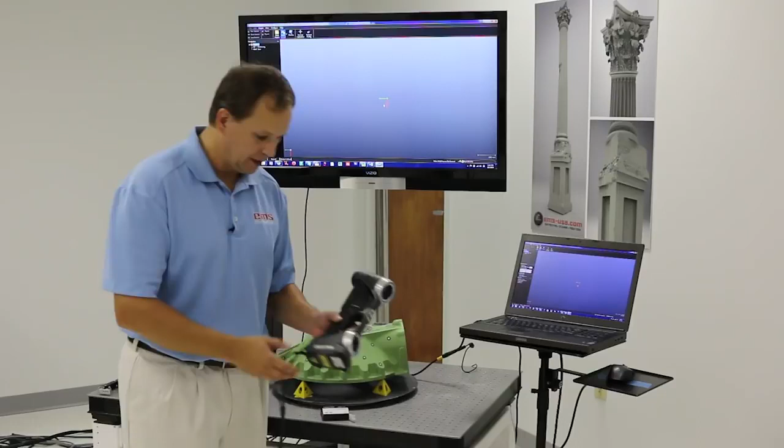In this video we're going to demonstrate the new Creaform HandySCAN. It comes in a 700 and a 300 model. Now Creaform's been around for a long time and known for its handheld scanners. This new scanner is really a big advancement in their handheld scanning technology.

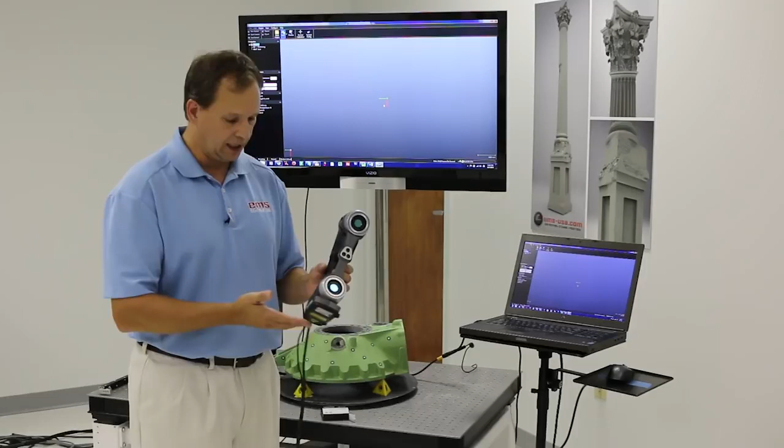The first thing you'll notice right away is just how small it is. You can see it's very narrow, it's very compact, lightweight, weighs just over a pound, very easy to handle and scan. So like most of their scanners, the way this one works is you've got two sensors here in the front, basically cameras, okay? And then here is where the lasers project out.

Now this is one of the new and unique things about this new model, which we'll talk about here in the demo today. And then around the sensor you have some LED lights that light up the targets, which we'll show and talk about here shortly.

This scanner, this is the whole unit here with a USB 3 cable, plugs into a compatible laptop or desktop computer with the Creaform VXelements software, which is basically the capture software. So again, very lightweight, very portable. This is great when you have to get out in the field and get into tight areas, such as a vehicle or inside a big industrial pump or big housing or anything like that.

It's laser based, so it works very well on shiny and dark things. It also works in outdoor light, direct sunlight. So that's very handy, or where you have parts that have varying color. Okay, and we've got some new buttons here on the back I'll talk about for handling situations like that. And again, very small and portable.

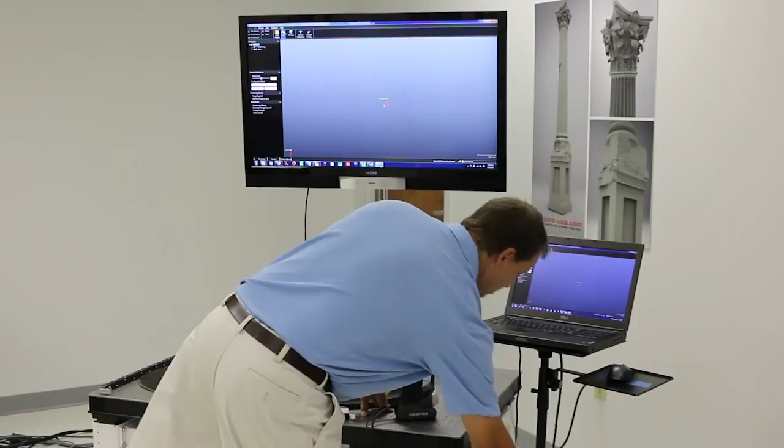Here's the case that it comes with. So you can see here it's very small. We can ship this overnight to all our different offices for a reasonable price. I can get it shipped overnight, and they can have it at the other office and get out in the field and start scanning. Or if we're going to go fly somewhere, I can put this into the overhead compartment on an aircraft versus having to check it as luggage. So again, very portable, very easy to use, as you're going to see here in the demo.

Now with the HandySCAN scanner, it requires targets on the part in order to scan, okay? And a lot of times people think, oh, targets, I'm going to have to target the part, that's a lot of work. It's actually really easy on most things, and then there's some other tricks I'll show you. The advantage of targeting the part is it allows many things to happen. One, I can move the part around because the targets are on the part. It's going to be looking at the targets and allow the part to move around.

The other thing is targets improve accuracy. Even scanners that don't require targets, most people end up using targets with them anyways because they'll improve accuracy. If you're just doing geometry-based alignment, which is basically take a scan, take another scan, line them up, there's more room for error in those alignment processes, and the more you scan, the more error you can get. Okay, so targets are really a good thing, and they come in different formats.

This is an aluminum part, so I'm using sticky targets. Basically, they come in a box like this. They self-dispense. I just pull this down, grab a target out, and place it somewhere here on the part. Okay, and you need the targets on a small part like this about every 3 or 4 inches. On something bigger, flatter, you might get away with larger targets. So we have the sticky targets, we have magnetic targets, and then we have other things we use.

So sometimes we have a small part or maybe a tall, long, skinny part. I might fixture up some target bars, have the part in the middle, and have maybe 2 or 3 of these bars. And as long as the targets are in the line of sight, the scanner will pick up the part shape while it's looking at the targets. So they can be around the part on something like this.

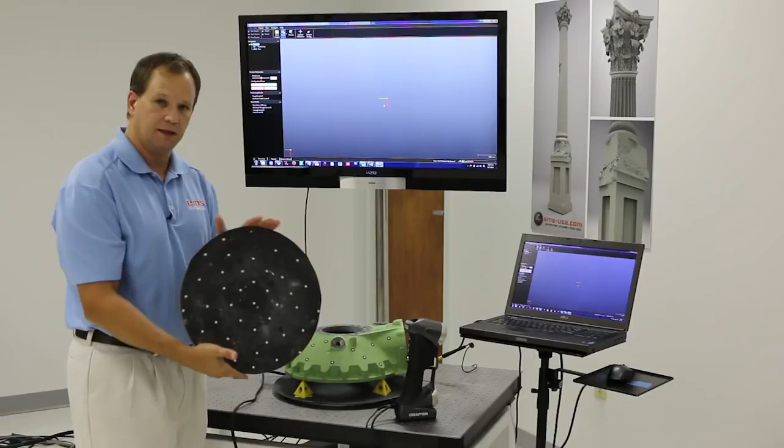Sometimes we'll just have a small part and set it on a table like this that has targets on it. The only disadvantage to this setup is once you set it here, since the targets aren't on the part, you can't move that part around, okay?

So the advantage of targets is, in this case, I've got a part that I have to scan both sides of. You're going to see me be able to do that automatically, whereas if I was using an ARM-based scanner, I'd have to scan the part, save that file, flip it over, and scan it again.

The problem with ARM-based scanners is the part can't move while you're scanning. The base of the arm can't move, and you need a real rigid setup, almost like a CMM, to keep your accuracy, otherwise you'll have multiple setups. You have to calibrate, and if you're doing large parts, you need a process called leapfrogging, and all of that introduces error. With targets, it just makes it easy to scan.

So about a minute to target a part like this, and you're going to see the payoff, which is how quick and easy we can scan.

So how targets work is really a process called triangulation. Just like GPS, where you need to see 3 or 4 satellites in the sky, the scanner does the same thing. It needs to see at least 3 or 4 targets, and most of the time it sees more than that, which lets it track its position as we continuously scan around.

So as we go around, as long as it can see those targets, it'll scan. If it can't, it'll stop scanning and go to a different spot. You can see the targets are actually random here on the part. You want them to be random - if they were all symmetrical, it would actually get lost.

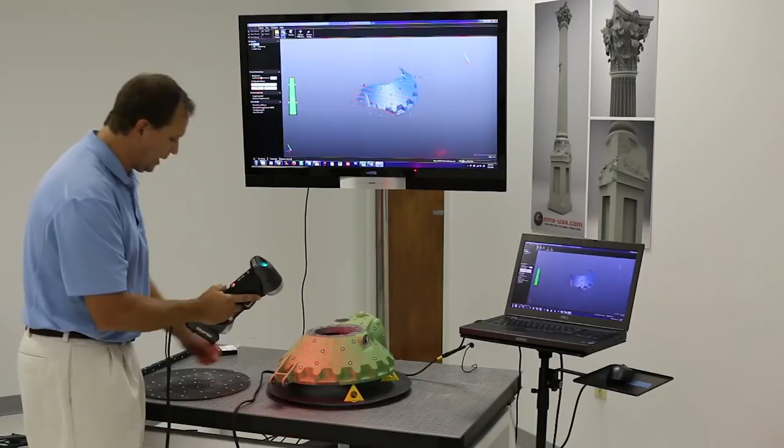Basically the way it works is there's a button on the back, and we literally just click it once and start scanning. You can see all the laser lines, and as I move around the part, you'll see the targets will either be white or red - as it acquires them, red means it's using it and white means it basically knows about it. You can see how quickly I'm moving around this part, and we'll move up and down.

Now we're going to get to an area here that's bare metal - real shiny - and it's actually doing a pretty good job. But at any time, I've got a couple different things I can control, one being the shutter, which slows down or speeds up. In this case I want to slow down the shutter speed and increase the laser power so when I have dark or shiny surfaces I can do that. The downside is I have to go a little slower because it can't capture the data as fast, but having this mode where I can turn it up and down right as I'm moving along is great.

So now I've already got that area, I'll crank it down a little bit, and you can see me moving along. Like all scanners, it's line of sight, so as I move around we want to aim the scanner perpendicular to the surface - that always gives us the best data.

Again, having the freedom of movement of my arm makes it very easy. You can see, if I want to get this wall in there, I just crank that over, and you can see it picking that up - picking up that flange, or that lip, whatever you want to call it.

Now the other thing this has is this single line mode. What it does is it orients a single line perpendicular to the lenses, and this is really good to get into narrow cavities. Scanners are not only line of sight, but basically the sensor has to see the light source, so when you get to something narrow, they basically never converge or see each other. So by orienting it perpendicular to the cameras and just doing a single line that the cameras focus on, you can see I'm getting down in this narrow area, getting down in these.

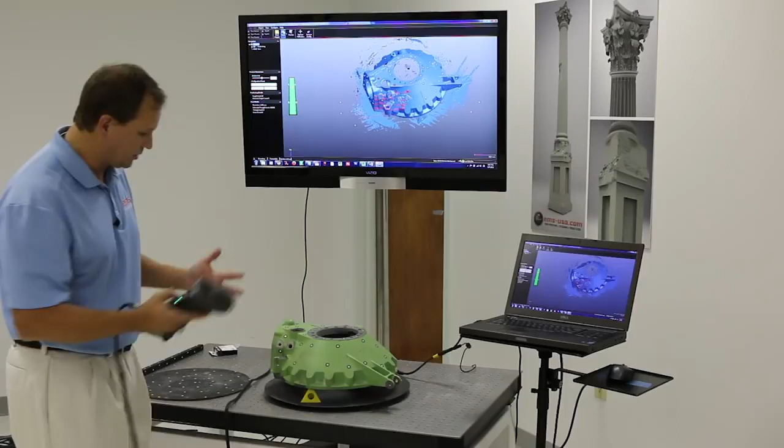But the beauty is I can start and stop anytime I want. So if I stop, have to do something, and let's say I forgot where I was, it doesn't matter. I jump back over here, and you can see it automatically orients the data to that position, because of the randomness of the target. So you can see I'm pretty much done. Probably doing more talking here than scanning, but I just go around.

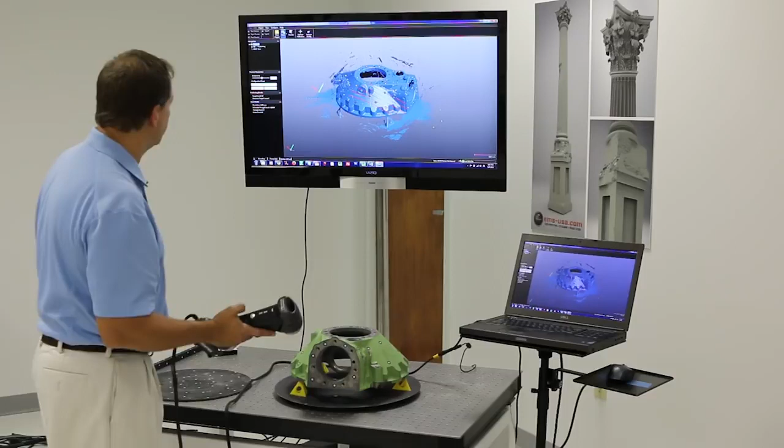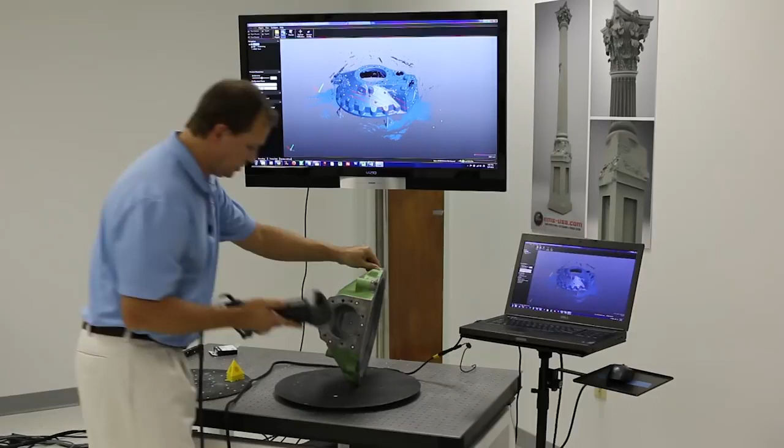Now, once I'm done here, I need to get to the back side of the part, and this is where targets really work out well. So what I'm going to do is lift the part up, hold it like this, go back to a known spot, which in this case works out real well right here, and just start slowly moving around. What I'm going to do first is just kind of scan it to grab the targets.

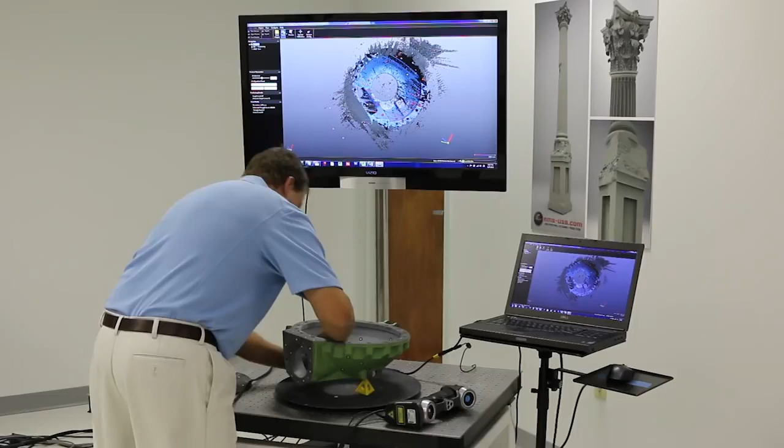And again, you can see the beauty, even though I'm sliding the part all around, it's still tracking everything. I'm going to put my little stands back on the part here, just to keep it up in the air. It just makes it easier later when we go to edit the data that I'm not connected to the table. So again, even though the part's kind of loose and falling around, it doesn't matter.

Now I can just keep rotating around and scanning, and you can kind of see all that table scatter data. That can be a real pain to clean up. But again, by just putting a few little stands underneath it, it keeps that data separated from our part data, so it makes it super easy.

So again, it's so easy to move around. I can even have the part moving as I'm scanning, which is really unheard of in a lot of different scanners. So it's continuous scanning. We're capturing up to, in this scanner, 480,000 points per second on the 700 model and 205,000 on the 300 model. And again, I can go to that single line mode.

I know it's probably hard to see up there because I've got all the scatter data, and you get that from the table. Some of the shiny areas are going to reflect some of the data, but it's just kind of out in space. Shortly here we'll go to the software and you'll see how easy that is to clean up.

So I can go into that single line mode, and it's kind of like digital spray painting. I just keep working my way around the part. I don't have to worry about over scanning the part, it's not going to hurt anything. I'll show you in the software how it takes all this raw scan data and processes it, but I can get down in these holes. And again, anytime I want, I can go back to that 14 line mode.

So it probably took me as long to target this part as it does to scan the part. Now, of course, I've been kind of talking as I'm scanning, but I could target this part in a minute and scan it in a minute, minute and a half, maybe 2 minutes at the most. And I can stop, look at the data, see some spots I missed, and go back.

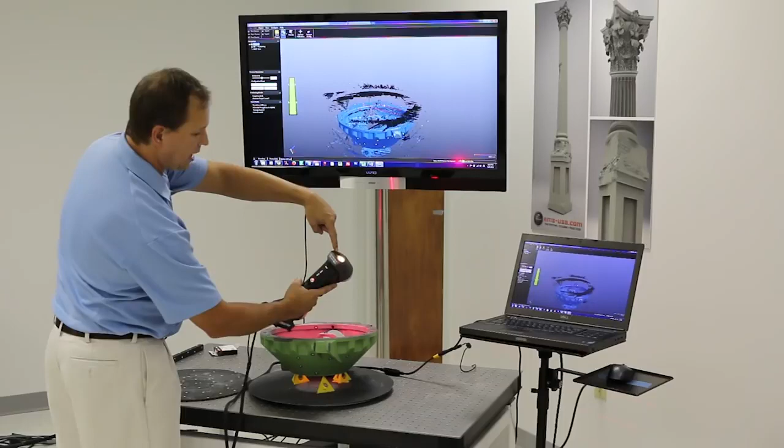Also, you got that green bar, that just shows me if I'm too close or too far away. There's also a readout right here too. So you can see I'm getting too close, it turns red. If I get too far away, it just shuts off.

It'll just stop scanning when it can't acquire targets. I come back in, so it's pretty easy to use. You don't have to be a CAD expert to learn how to use this scanner.

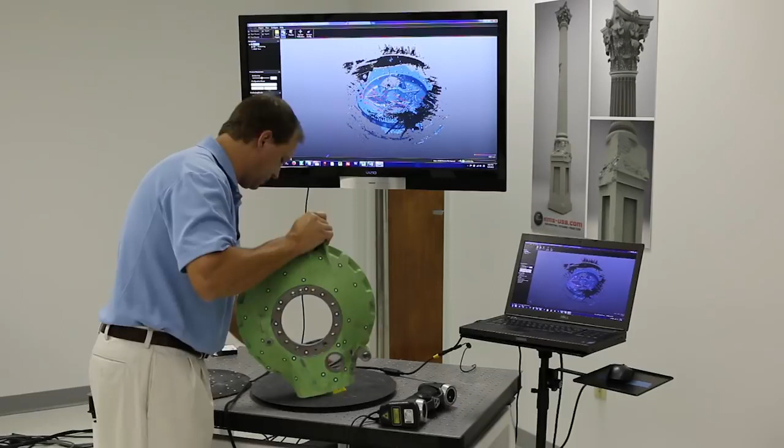Some basic training, basic techniques, and you can send really anybody out to do the scanning. I just keep going along until I think I'm done, then stop and we'll process the scan data. I could also take the part if I thought maybe I missed a spot on the other side, or maybe stand it up on end like this.

And continue scanning, so it'll jump around. Again, because it's all line of sight - all scanners are line of sight - it makes it great to be able to hit it at every angle to make sure I've got all my scan data. Okay, so that's really it.

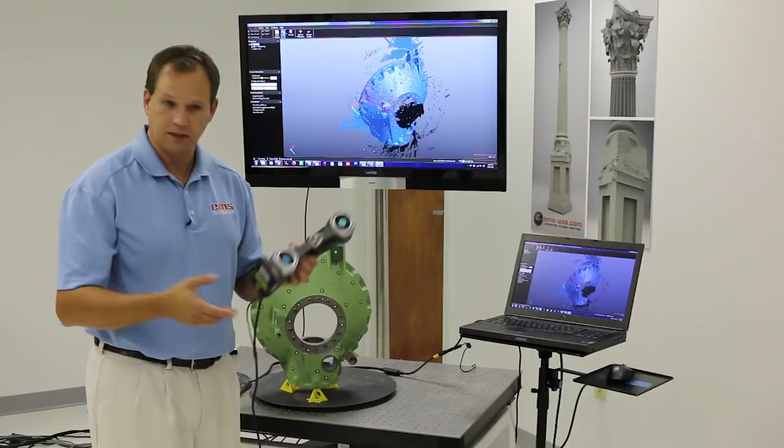Very easy to use, very small, very portable. It's really getting that kind of metrology grade in a handheld. Very, very high accuracy - just over 1/1000th of an inch, which was unheard of not too long ago in a device like this. So very easy to use, small, portable, laser-based, which is good for dark and shiny surfaces as well as other types, all in a nice package.

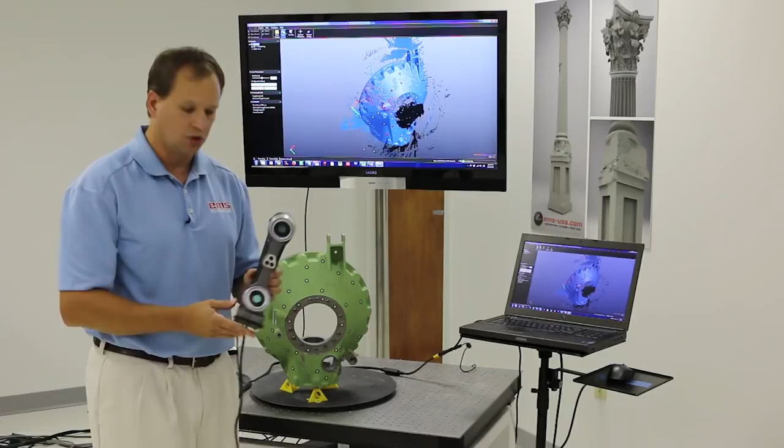So what we'll do next is go into the software, look at the scan data, and show you how to clean it up and get it ready for downstream applications like inspection, reverse engineering, or some other process we may want to do.

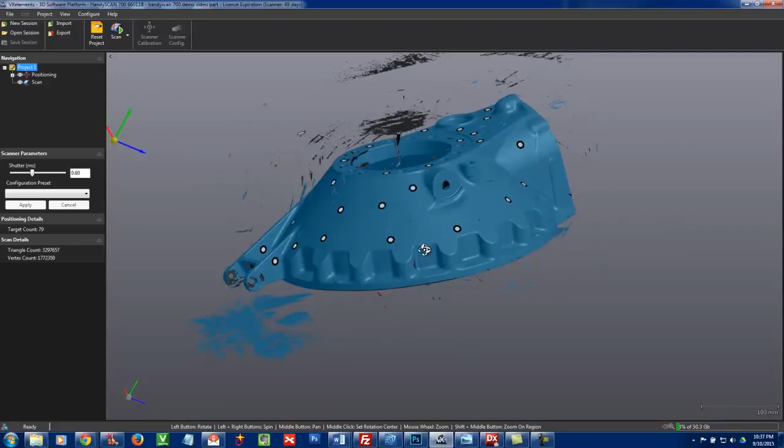Okay, so here we are now in the VXelements software, and this is the capture software that comes with the scanner. We can rotate the part around, look at it, and do some basic things in here. You can see where our targets were on the part.

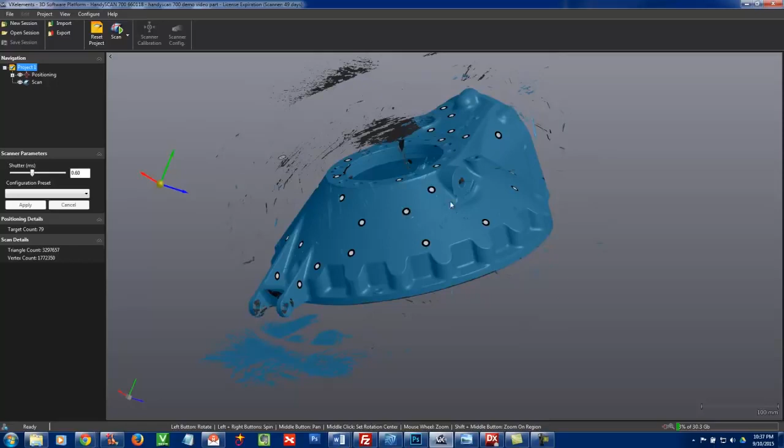Now when we're done and we process this data, it actually does curvature-based hole filling - curved where there's curvature on the part and flat where there's not. We'll fill in where those targets are, so when we're done here you won't even notice where those targets were.

So the first thing I want to do is some basic cleanup in here before we take it to any downstream application. That'll just make it easier to work with, and there are some nice tools in here to work right with the raw scan data.

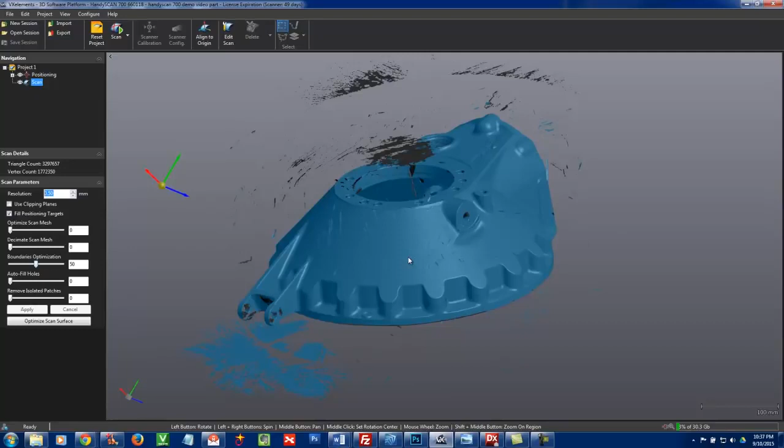So I'll click on the scan button and show you a few things. Right now our resolution is set at 0.5 millimeters. Now underneath this polygon model, which are basically triangles, is raw points - all scanners just collect raw points. What you're seeing on the screen here is polygons, triangles, and we've set it to be 0.5 millimeters.

You can set that up or down as needed. So if you had something more flat, you could make larger triangles, and if you had something with more detail to it, you'd want to make that smaller.

Now resolution and accuracy are two separate things. The accuracy is really those points, those triangles. Resolution is really the fidelity. So even if I crank the size of the triangles up, theoretically it would still be accurate - the corners or vertexes of those triangles would be accurate, but we'd start to lose fidelity of the part. So it's really the balance of resolution and accuracy that gives you optimal results.

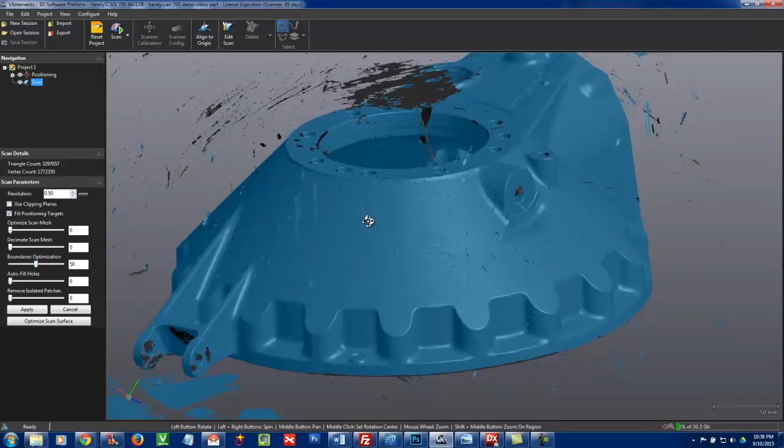As we mentioned before, we've got this scatter data where we had the part on the table and then flipped it and scanned it again. One nice tool in here is remove isolated patches - you see as I slide that along, it instantly gets rid of all that kind of data that's floating out in space. So when we scan, we really don't have to worry about that.

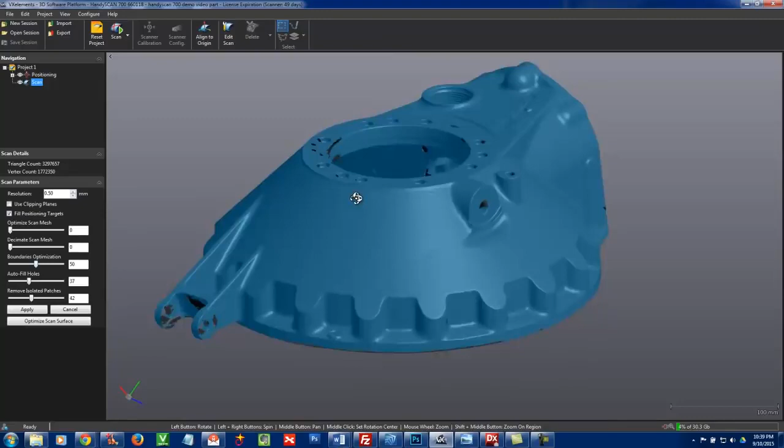We can also have it auto-fill in holes. You'll see some small areas we missed, especially in some of these shiny corners where we had those machine surfaces. For our reverse engineering, it's not critical to have a completely watertight model - as long as we have most of it, we'll be just fine.

And you can see the quality of the data - you can easily read that serial number on the part or part number. You can even see the roughness of the casting, and see here where there were some blemishes and some different things. So very good quality, very clean data.

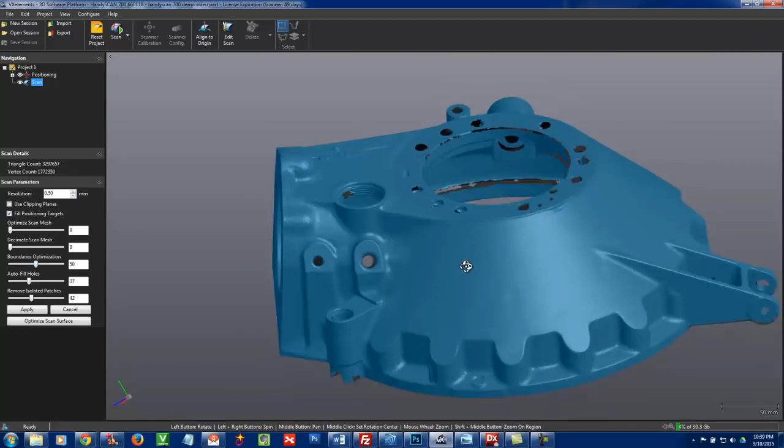And then we can also optimize the scan mesh - I'll slide that one up a little bit.

Boundaries optimization, that just sharpens up the boundaries. We can also decimate. I'll leave that turned off. So once we get all these settings the way we want, and if you notice we're at about 3.3 million triangles right now, let's go ahead and hit apply.

And what it's going to do now is go back to that raw underlying point cloud, optimize the mesh a little bit, just kind of clean it up, any kind of points that are still maybe floating out a little bit, sharpen up the edges, fill in some of the holes, including where the targets were, and permanently remove those isolated patches. So this will take a few minutes to do, but once this is done, we're going to have a nice clean model.

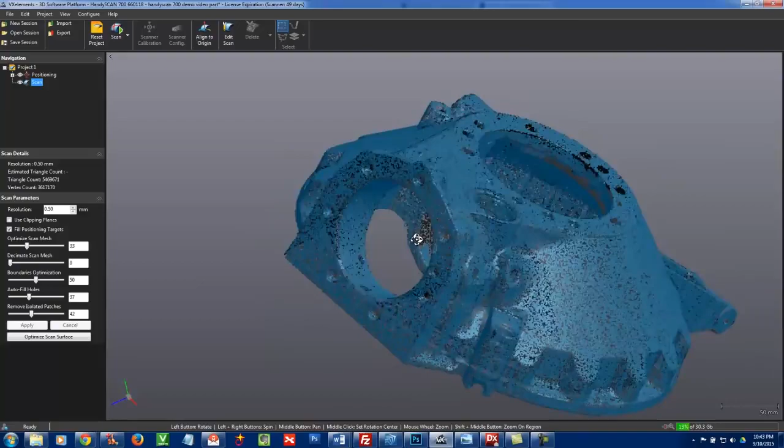For time purposes, we went ahead and paused the video. But you can see now here it's really cleaned up the model nice and gotten rid of all that data, and you can see our polygon count has dropped down a little bit.

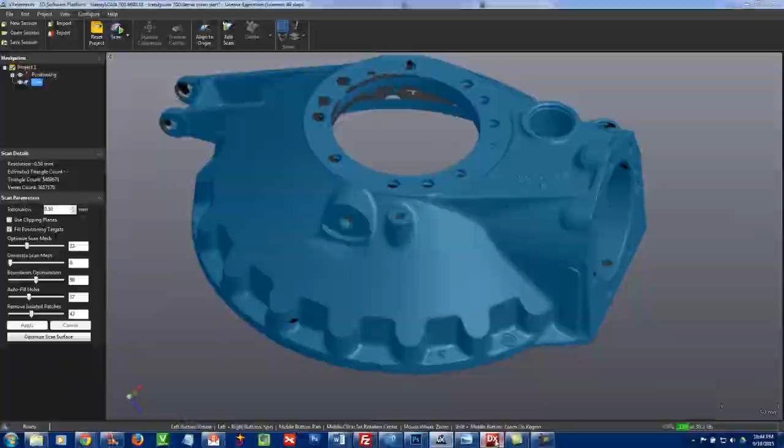So next thing we're going to do is just come in here and we're going to say export and export the mesh, and we'll just overwrite this file here, and basically it's going to stick it out as a polygon mesh, and that can go out in formats like STL, PLY, VRML, and many others. And really what we're trying to do is take it to a downstream application such as VXmodel, which has some basic editing and auto surfacing. That's another product from Creaform.

Or in this case, I'm in Design X, which is a full-blown feature-based solid modeling and surface modeling product that can bring in scan data and work with it. Because most CAD systems can't really do much with scan data. They can bring it in and look at it, but it's a huge polygon file, and they can't do much else with it typically. So here we are in Design X, and let's take a closer look.

And I'm going to turn on the edges of the triangles. So if I zoom out, you can see it just looks like a blob. But when I zoom in, you can actually see that 0.5 millimeter nice even spacing of those triangles across that whole part. So that's basically what this is. And let's just go back to our shaded view.

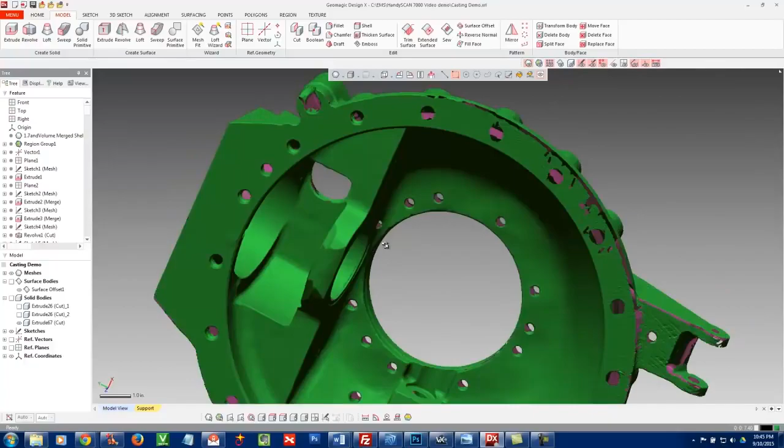Okay. So then from here, what we're going to do is typically set this up in a coordinate system and then start modeling it. Now in this demo, we're not going to do that, but basically the end result would be this. This is a feature-based solid model of that part from that scan data. And really how that's done is if we go over here and look, this is history tree modeling, just like you would see in a SolidWorks, a Pro Engineer, a Siemens, an Inventor, and others.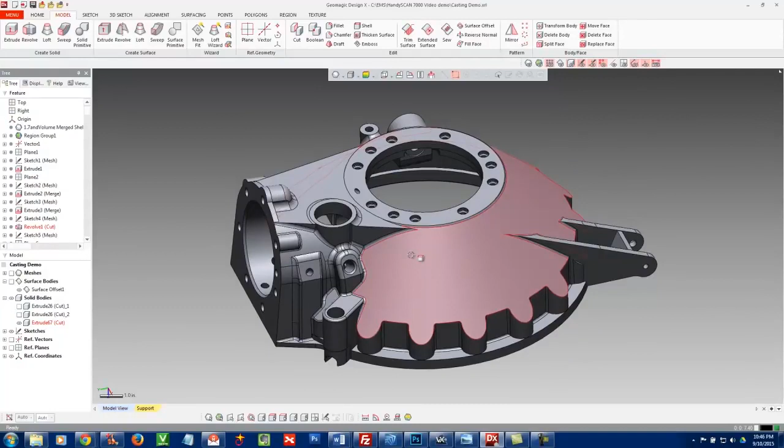And if you roll all the way through, you can see there's about 70 features and 30 or 40 fillets and chamfers and other things. So this actually took about a day, probably a day and a half, to build this CAD model from that scan data. It's not an automatic process whatsoever if you want a feature-based model. You could do a quick auto surface, but that's not going to give you features. That's not going to give you planes and cylinders and things like that. So this is what we really want.

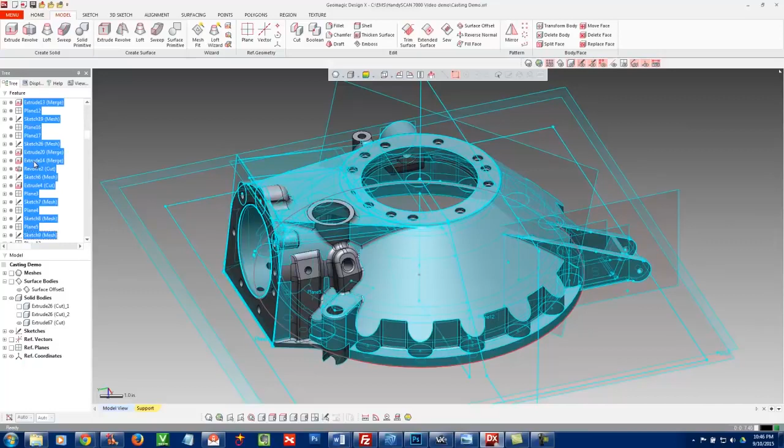Again, how that works is if we just come in here and take a look at the first sketch and start to walk through the history tree, you can see it's just like a CAD model. So basically we extract sketches from the scan data, we define those sketches, add parametrics, dimensions, just like you would do in a CAD system, and then we extrude or we revolve, or we may make a series of sections and then loft and so forth. So it's still a pretty involved process all the way through the model.

Now, it's definitely more accurate and faster than if you tried to do this manually. If you had to manually measure this and do it, it would certainly take you a lot longer, and it wouldn't be very accurate. This is definitely the best way to go.

Now, if we turn the scan data back on, you'll notice there's differences between the scan data and the CAD data. As we're modeling this, one of the things we're going to do is turn on what we call our accuracy analyzer. And what that's going to do is compare the raw scan data to the CAD data.

And if you look over here, we're in inches now, where basically everything in green is within 0.004 of an inch. Everything headed towards red is in the positive direction, out of tolerance, and blue is in the negative direction.

So when we reverse engineer, we're going to take and scan a manufactured part which is imperfect, and we want to redesign it or re-engineer it back to a perfect CAD model. So you can see when we do that, we're going to see inaccuracies or differences in the CAD model compared to the scan data. So for example, this flange here at the top was certainly designed flat, but when we scanned it, it wasn't flat.

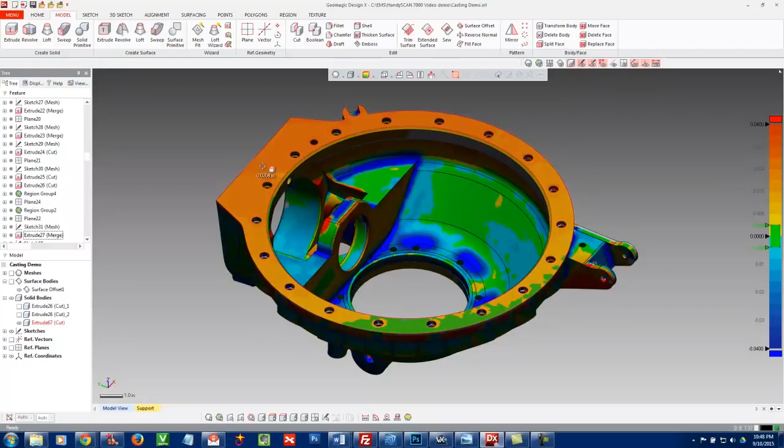Let's roll over and look at the bottom and look at this main flange. Again, same thing. Part of it is in spec and a lot of it isn't. But again, when we reverse engineer it, we're probably going to want to make that flat. Now, other areas of the part over in here, these kind of near net areas, they don't have to be perfect. We're not too worried about those.

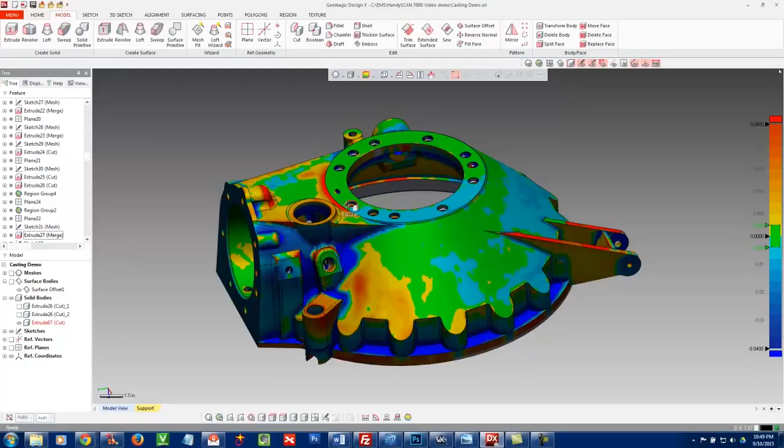But certainly hole locations, flat areas, we definitely want to try to either average that deviation or review with the customer and try to determine how they want some of this stuff modeled. But typically we're going to want to reverse engineer this back to the perfect CAD model. So again, as we're designing this, we can look at those differences and make judgment calls on what we want to do. So let's turn that off and turn off the CAD model and just look at this again.

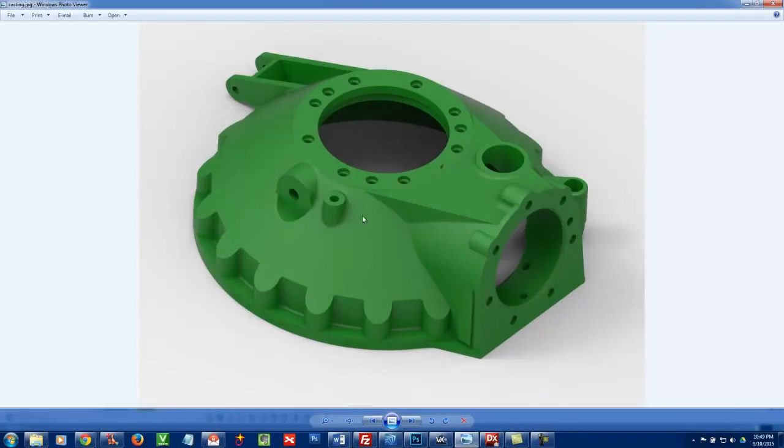So again, what we did here is we took this raw scan data, basically feature by feature, cutting sections through the data, building those sketches, and then extruding, lofting, and so forth. And we have other videos that go into a lot more detail in the actual CAD modeling process. Now the other thing we can do once we're done is we could generate, for example, a rendering from that CAD model or an animation, as you see here. So that's always a nice deliverable for the customer.

And then finally, what we're typically going to do is we're going to take this CAD model and we are either going to export it as a CAD file, and we can go into neutral formats such as IGES, STEP, Parasolid, ACIS, and a few others, or in Design X there's a thing called Live Transfer. And what that will do is that will actually transfer the file to SolidWorks, to Siemens, Creo or Pro/E, AutoCAD, Inventor, and Solid Edge.

And how that works is you have to have that host CAD system, and it'll roll back the history tree, it'll open up the CAD software, and it'll literally rebuild each one of these features in that host system. It'll build planes, it'll build sketches, it'll do extrusions, everything. The advantage of that over a neutral file is then you have the history tree. So if you were going to do further editing to this file or make changes to this part, it would be easier to do having those sketches, having those individual features.

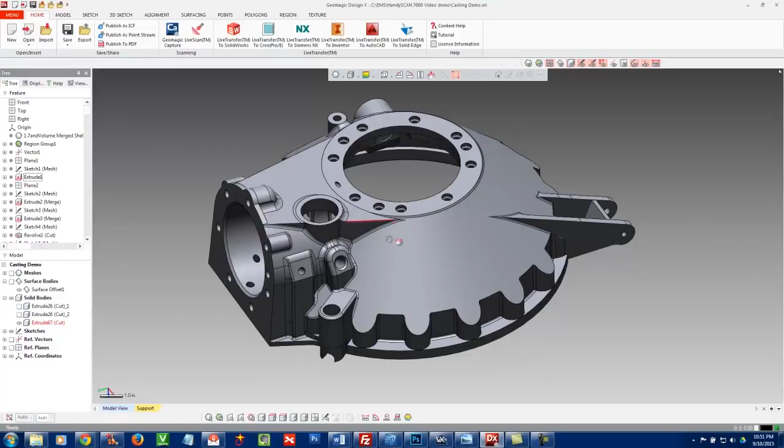Now, the live transfer isn't perfect, and it depends on the CAD system, but anywhere from 50% to about 85% of all the features and sketches go through automatically. And the things that it can't solve, you usually have to go in and do some manual intervention in the CAD system and then let it continue doing the transfer. But it's a very powerful tool to get a native CAD file when it's required.

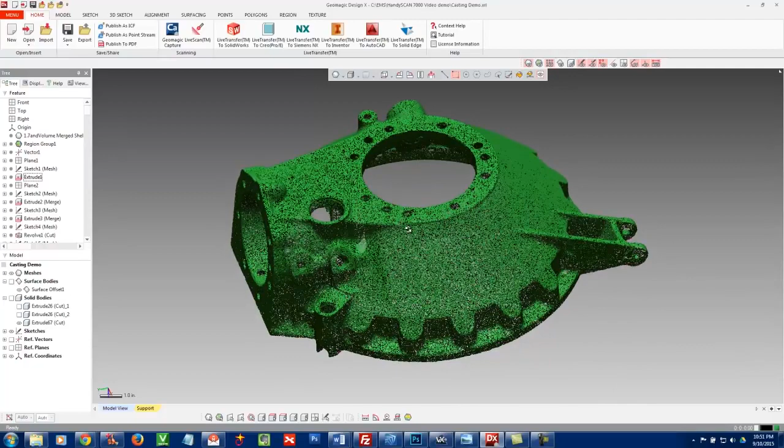So just to kind of wrap up this video, we took the Creaform HandySCAN 700. We 3D scanned this part literally in a matter of minutes after putting on some targets. And then we cleaned up the data a little bit in VXelements, brought it here, in this case in Design X, where we reverse engineered it into a feature-based solid model, and then we're either exporting it out in a neutral format like IGES or STEP, or using that live transfer to get a native file. So that concludes this demonstration.